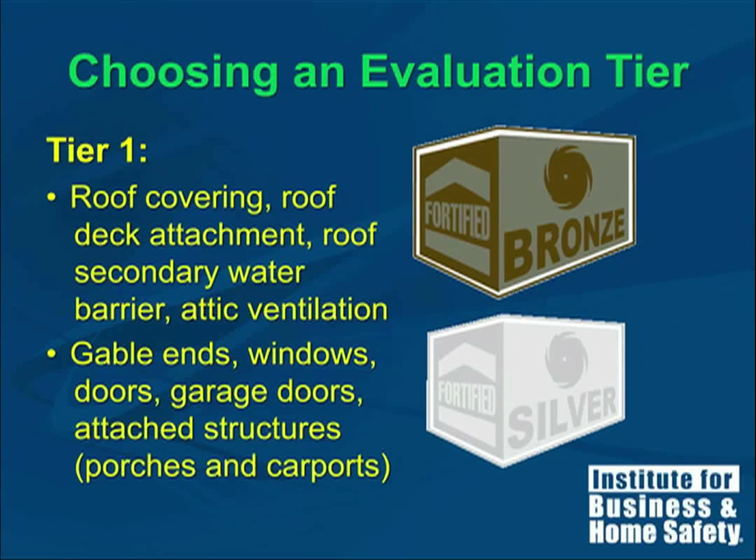The silver takes all of those same improvements that are done in bronze and adds to it gable ends, bracing for gables that are over 4 feet tall, opening protection, and proper connection of attached structures. You cannot qualify for silver without meeting the standards for bronze. The final tier is tier 2, and that is the gold designation.

And the reason we separated those designations into two tiers is that with bronze and silver, generally the systems that we're concerned about are easily observable, and we can get accurate data without having to be too intrusive in the home. The gold designation, however, really seeks to identify and confirm that a continuous load path from the roof all the way to the foundation is properly installed. And sometimes we just can't see that without cutting drywall or removing something to be able to see those connections. So we separate those two things.

You cannot qualify for gold without qualifying first for bronze and silver. So typically an evaluation is performed looking at the bronze and silver elements, and then if bronze and silver is satisfied, then going to gold. Generally speaking, it's not very successful if we try to go directly to gold because of the inspection process. It is possible that when trying to achieve a gold designation, it may be necessary to have a professional engineer involved in that process.

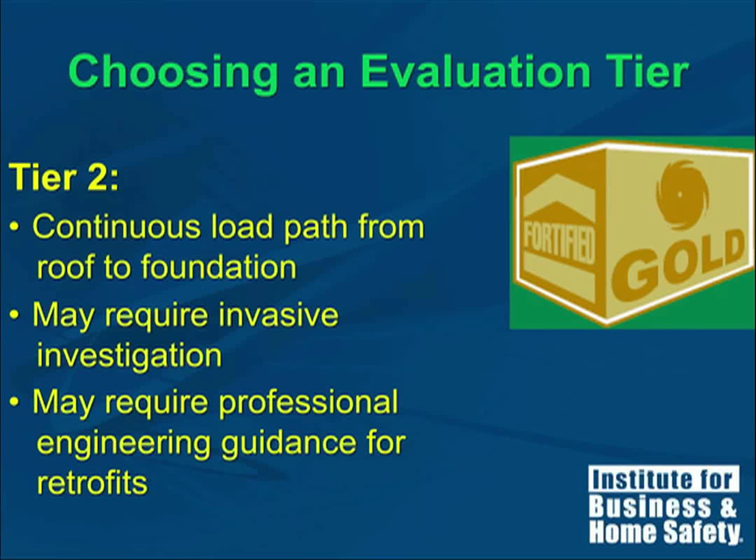Generally speaking, gold designations can be achieved by recently built homes that are designed properly and executed well, and homes that are being significantly remodeled, either as a part of just normal remodeling or after an event. So these next few slides just kind of outline the goals of each level of designation.

The goal of the bronze designation is to minimize damage during a Category 1 storm. Again, I have to reiterate that these are not shelter-in-place guidelines. In other words, if a storm is heading towards the North Carolina coast, it's only a Category 1 storm, but an evacuation order is given, families need to evacuate. We're just saying that the home should still be standing and there should be minimal water intrusion after a Category 1 storm if you have a bronze designation.

The bronze designation is the entryway into the entire program, and there are two ways to achieve a bronze designation. You can achieve the bronze designation without replacing your roof covering. In other words, the existing roof covering, whether it's shingles, metal, tile, or some other material, is in good shape and has more than a 5-year usable life left in it. If that's the case, then you can qualify for bronze designation without re-roofing.

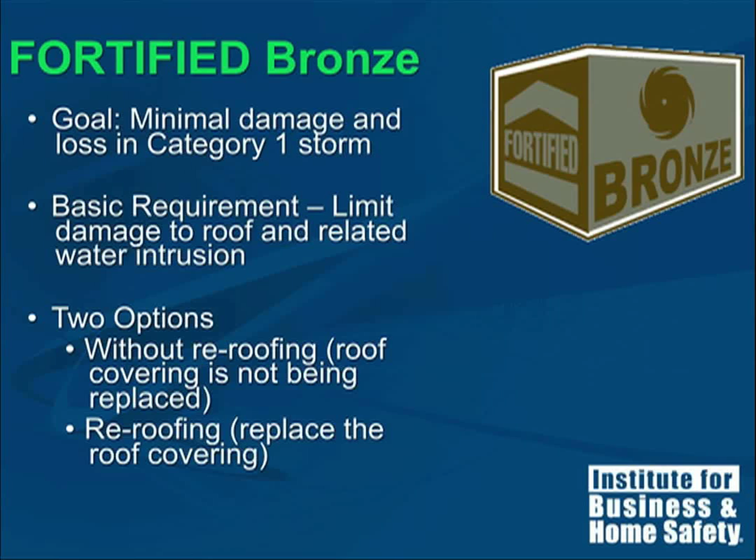If your roof needs to be replaced because of normal maintenance issues, then the second option is available to you, and you can qualify for bronze with re-roofing. And that makes some of the retrofits easier to do and gives more options to achieving some of the standards.

The single biggest criteria for the entire Fortified for Existing Homes program is the existence and application of what we call a secondary water barrier. It's really not secondary. It is a method for keeping water from penetrating through the roof in the event that the primary roof covering is lost. But we'll talk about what it means to have a secondary water barrier.

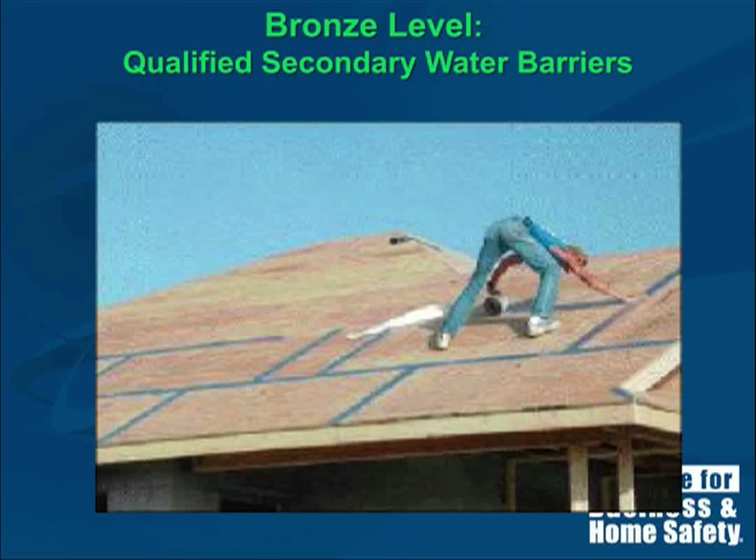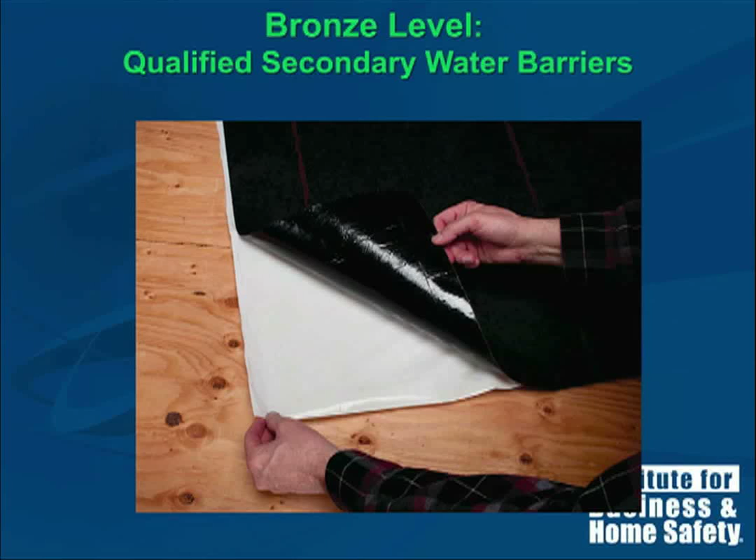So this is one method. A roofing contractor can use 6-inch wide tape, a special modified bitumen tape that is applied to all vertical and horizontal seams, and then the normal roof underlayment can be applied. This is the simplest and most cost-effective way of accomplishing this water resistance. Another method is to apply a fully adhered membrane called peel and stick.

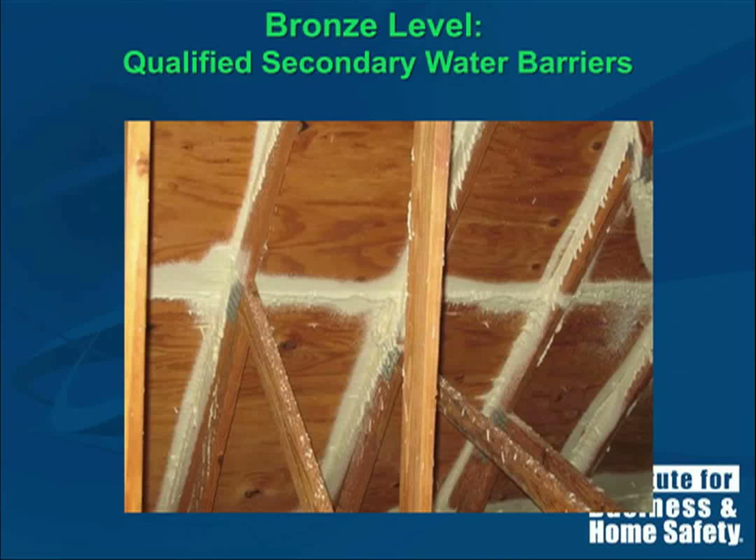This has become more common, more frequent lately, but this is another method. Finally, even if your roof covering is not being replaced, it is possible to install a qualified secondary water barrier from within the attic. So you don't have to replace your roof covering if you don't have a secondary water barrier. This option is available to you provided there's attic access.

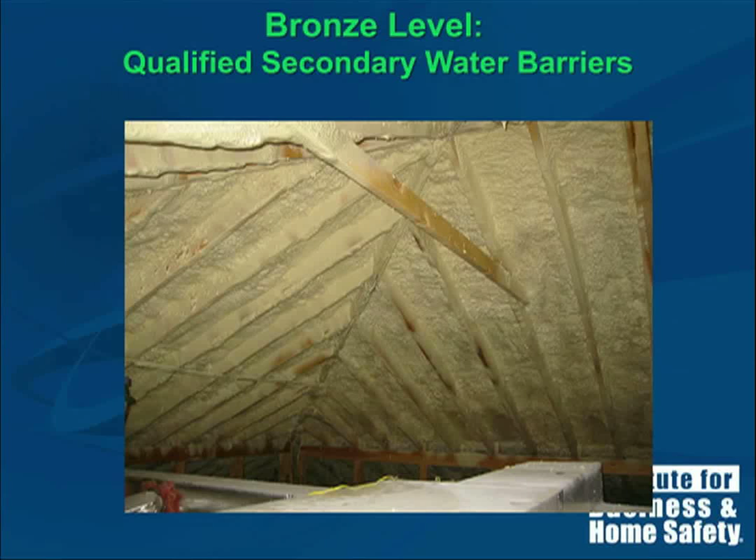You can see here that the horizontal and vertical seams are all sealed. And that's a closed cell polyurethane foam that is installed. This is the same type of material just applied to the entire underside of the roof deck. In this case, not only is this material providing secondary water resistance, but it's also serving to provide supplemental attachment of the roof deck to the roof framing members.

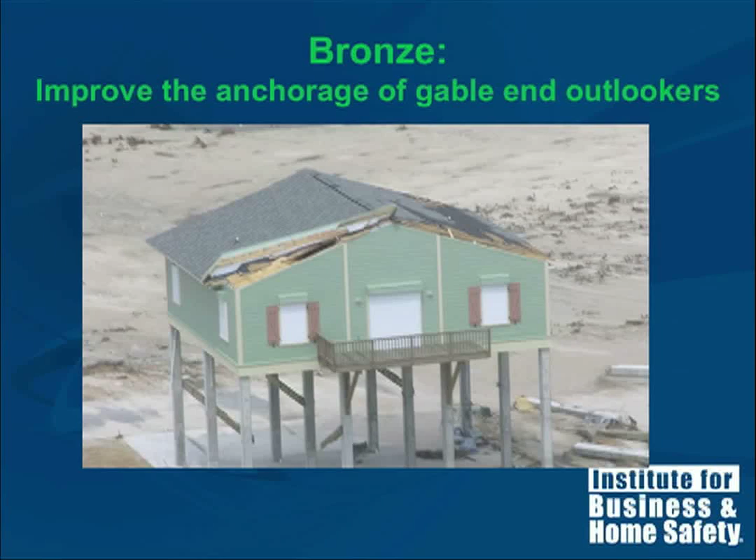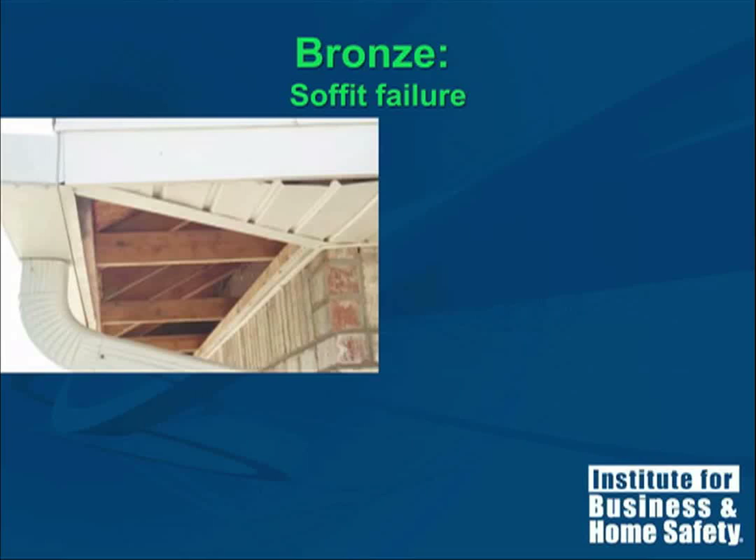Another area of weakness that we deal with in the bronze level as part of the attic ventilation system is the soffits. These are the horizontal overhangs. This type of failure can lead to this type of damage inside a house that is otherwise structurally intact. And finally, when you have a gable end that is vented as part of the ventilation system, we're making sure there's a method to cover that vent and prevent water intrusion during a storm.

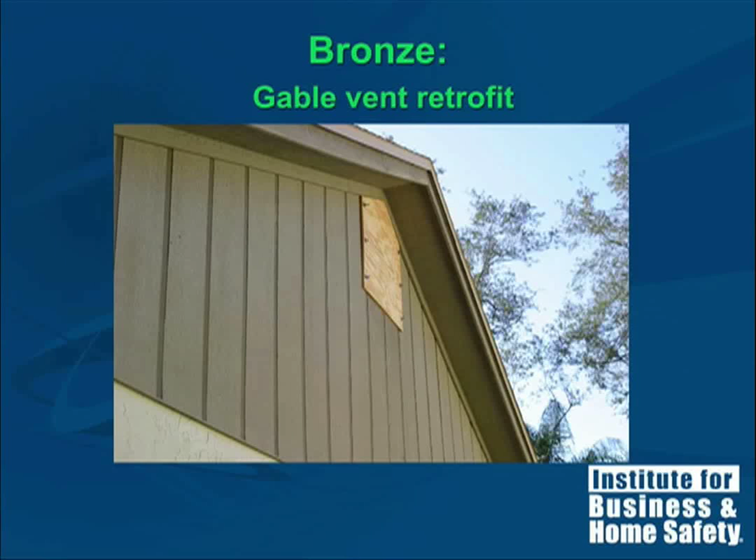Moving on to the silver designation level, silver incorporates all of the improvements we just talked about, but now we're also talking about protecting openings that are in the building, windows, doors, garage doors, skylights, and we're also talking about bracing gable ends and improving the connection of attached structures like carports and porches to the building's foundation.

These are just some examples of things done right and things lacking protection. The picture on the left, you can see that the sliding glass door is damaged and has been completely dislodged as a result of furniture that has been pushed out from the house through the sliding glass door. This is the result of an opening somewhere else in the building failing, and the pressure building up inside the home enough to move that furniture and push it against the door with such force it caused it to fail.

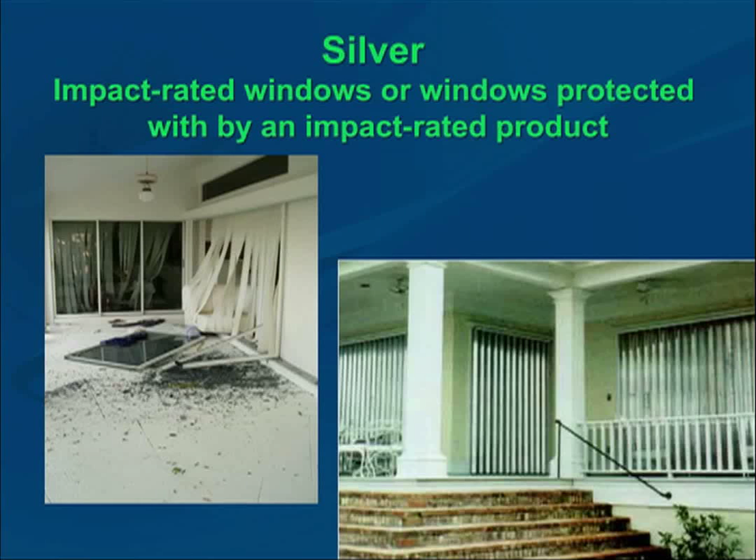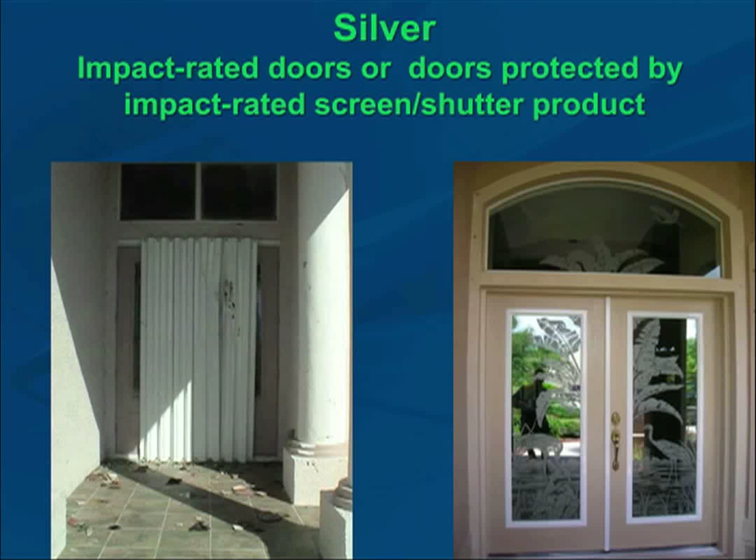Pressurization is the reason why we try to keep openings protected so that structures and other components don't fail. The lower right is an example of a qualified opening protection installed over doors and windows. Here's some more examples. It is possible to qualify for a silver designation if you have either shutters or impact rated products like the ones you see on the right.

Garage door openings represent some of the biggest openings in a house. Even in those that are elevated up off the ground, you may not have garage door openings frequently, but when you do have a garage, that opening, if it fails, causes an extreme amount of vulnerability in the house. So we're making sure that garage doors are properly pressure rated, and if they have windows, that they are impact protected.

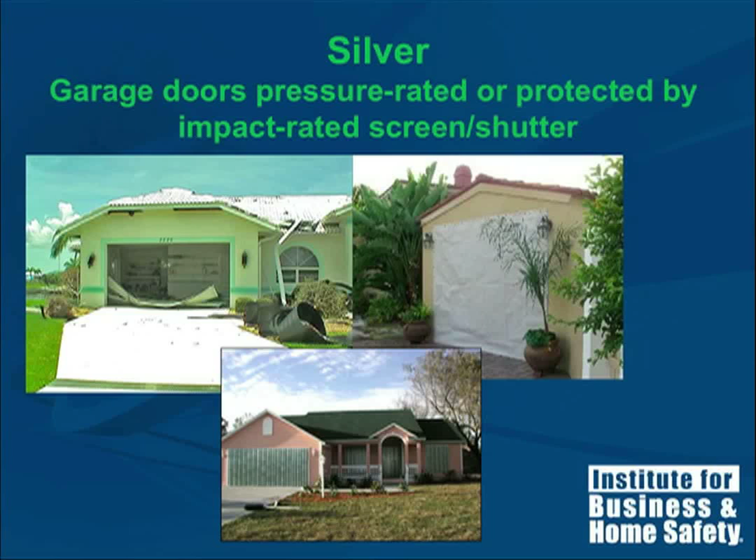Gable ends are some of the most susceptible features on a home. The reason is that the triangular shape that forms that gable has to be connected to the wall beneath it. At that connection point, if it's not properly braced and properly constructed, and the codes didn't provide an adequate bracing methodology until recently, that connection point at the bottom of the truss or rafter to the wall acts like a hinge, and it can either be pushed in or sucked out away from the home. This type of failure is very common in a high wind event. So we make sure that any gables that are over 4 feet tall are properly constructed and/or braced.

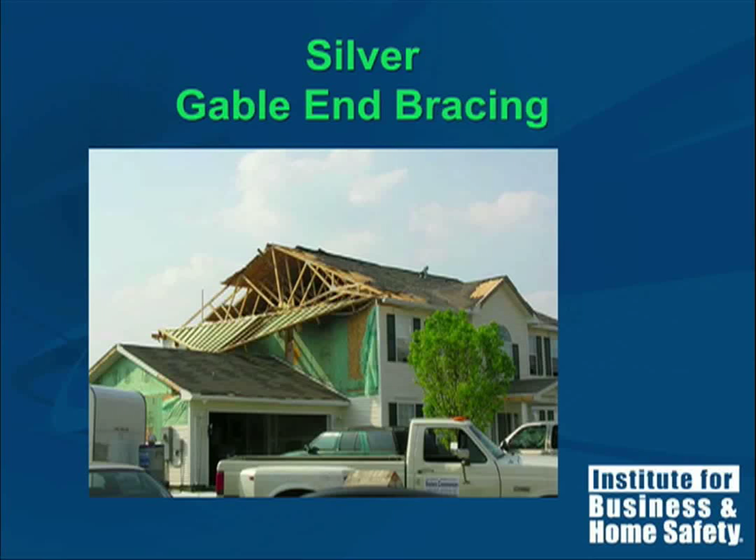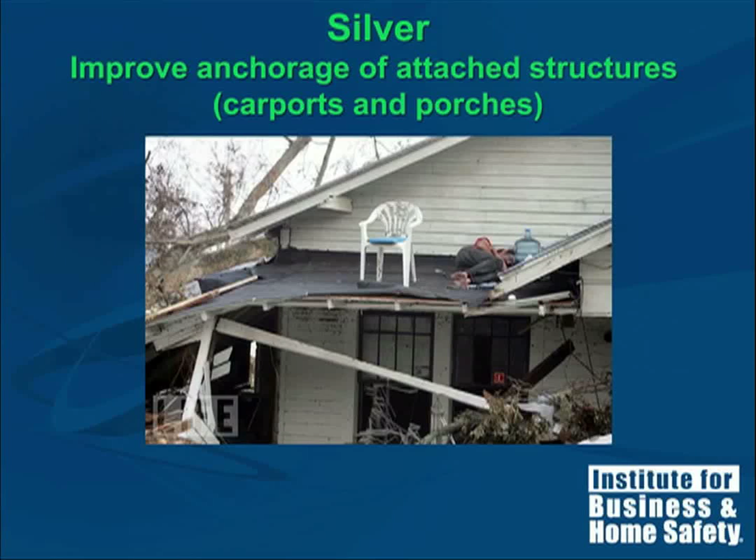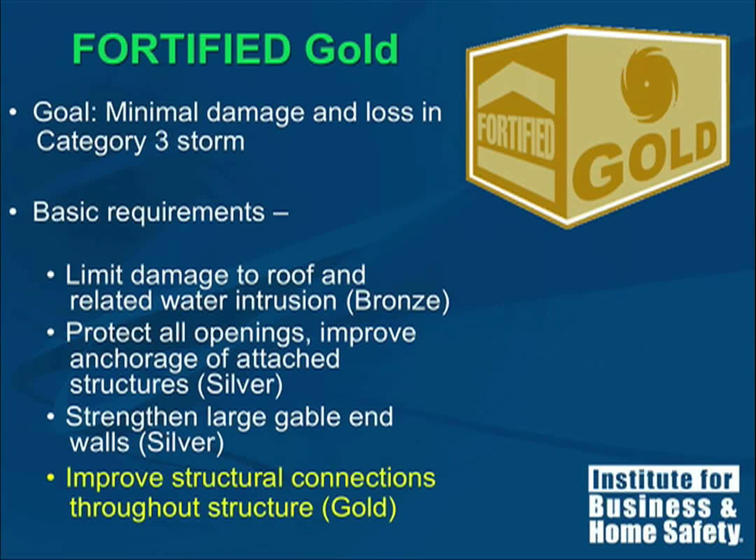For the gold level of designation, remember this is the third level of designation, and this now is tier 2. The gold designation, which is the highest level of existing home designation, qualifies for the greatest amount of credit for an existing home. The goal here is to minimize damage from a Category 3 storm. We're doing all of the bronze improvements, all of the silver improvements, and now we're making sure that the home has an adequate load path.

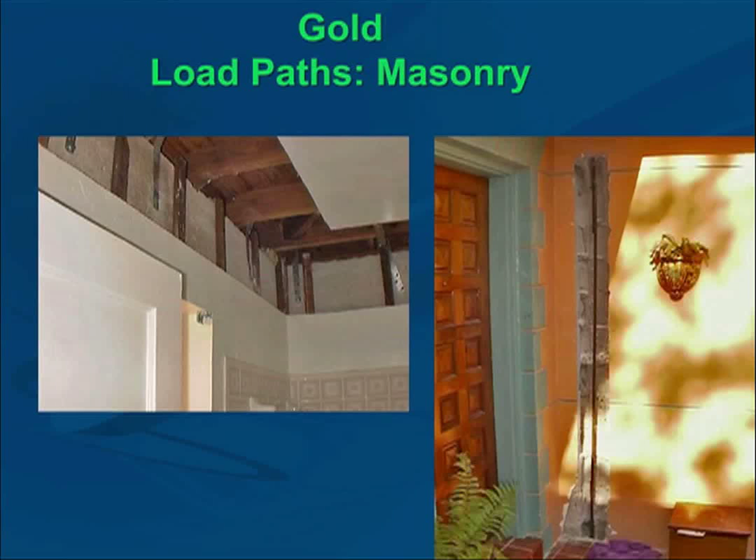These are some examples of what it looks like to make sure that a home has a load path, or that one is installed. On the left, it's a home that's being remodeled, and you can see that a strip of drywall has been removed from the wall and the ceiling, and metal straps have been added to tie the roof down to the structure. On the right, this was previously an unreinforced masonry wall that also is very susceptible to failure, and this cell has been opened up and rebar has been installed.

In addition to protecting the windows and other openings from impact, at the gold level we're also now protecting them from pressure vulnerabilities. It is possible that with a shutter installed over an opening, the window or door behind it can still be pushed in or pulled out as a result of pressure, but the shutter itself keeps the wind from infiltrating the house and building up pressure that can cause structural failure.

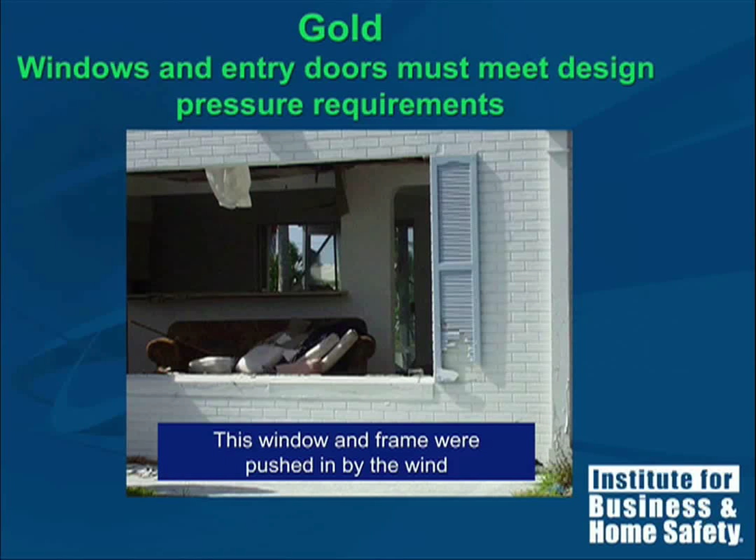So the most frequent question I get for Fortified for Existing Homes is, how do I get customers to qualify? How do they start the process? So there's basically a 5 or 6 step process. The homeowner must apply for an evaluation at www.disastersafety.org. There's an application on the Fortified for Existing Homes page. Once they make application, which costs nothing and takes about 5 minutes to complete, they'll be given a list of evaluators that are certified and trained by IBHS in their area. They contact the evaluator of their choice and arrange to have an evaluation completed in their home.

After the evaluator completes the gathering of data, he provides that data to IBHS. IBHS then reviews the data and issues a report called the Current Condition Report. That report goes back directly to the homeowner. The homeowner then reviews it and, if they don't qualify for designation, decides what retrofits and what level of designation they want to pursue, and then puts a plan in place to do that. If they do qualify for designation, a certificate will be sent along with the report identifying which level they do qualify for.

Assuming that the house needs retrofit or mitigation of some sort, when the homeowner initiates that work and has that work completed, the evaluator comes back out and looks at that work as it's being done to make sure that it's being done in accordance with the Fortified standards. After all the work is complete, and the file is complete at IBHS, then IBHS will issue a designation certificate.

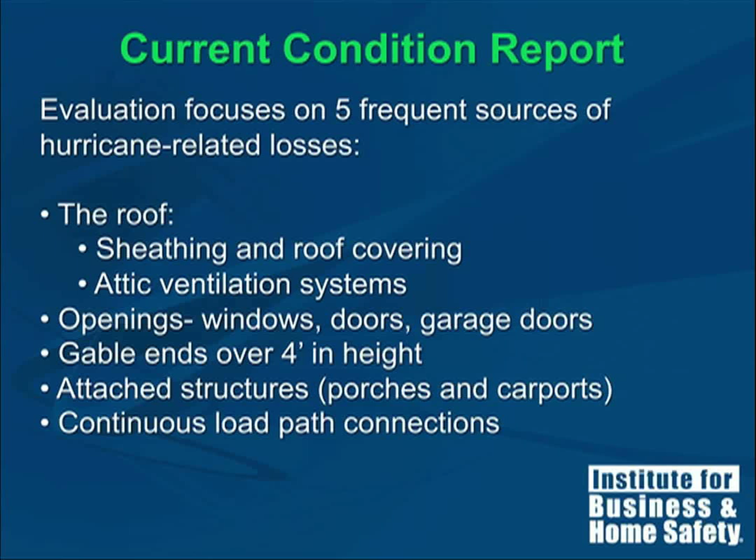So a review of the Fortified for Existing Homes program. Single-family homes are the only properties that are eligible for either one of the residential programs. So only single-family homes can qualify for Fortified for Safer Living or Fortified for Existing Homes designation. Who can provide Fortified evaluations or inspections? Only IBHS certified evaluators. Professionals that meet our qualifications and are approved to attend in-person training or video training, and are tested and then certified by IBHS, and then a directory is published so people can find certified individuals in their area.